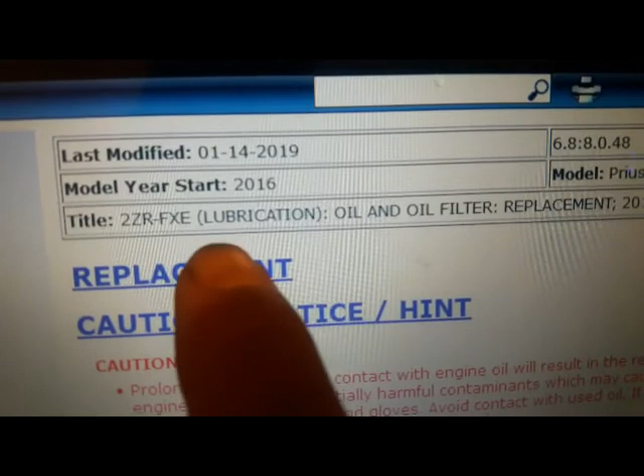So let's take a look inside here to see what technical information I need for this Prius. This software here tells you the engine type, 2ZR-FXE.

So this is for Prius from production date, I guess, November 2015 to December 2018. Same procedure, I'm going down to the oil change section. And on here, first thing it tells me is to go down there, look at the plate like that, and take off the three screws in the rear there.

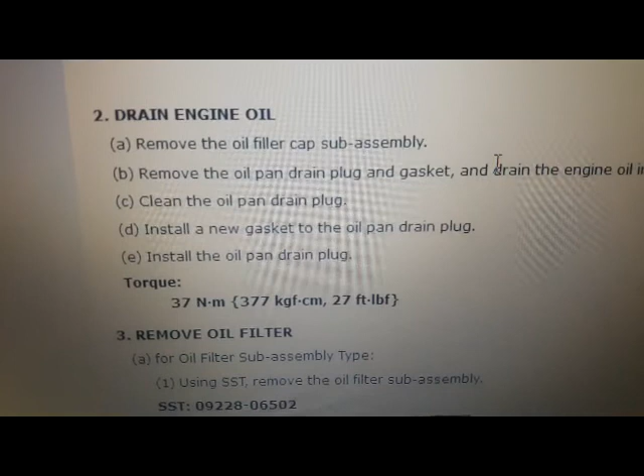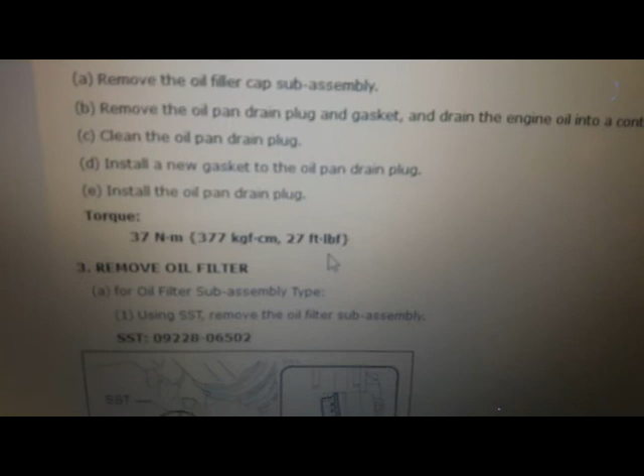After that, drain the engine oil. And the torque that I'm looking for here is 27 foot-pound, right there, for the drain plug. Okay, come on camera, focus. There you go, 27 foot-pound.

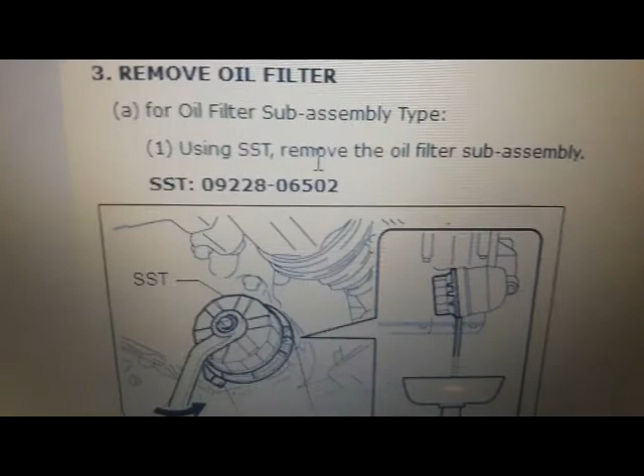Alright, under the removing oil filter section, that's when I realized that this model of Prius has two types of filter. One of them is called the oil filter sub-assembly type, okay, which is this one right here, sub-assembly oil filter, and there's a part number for it, and that looks like a regular oil filter.

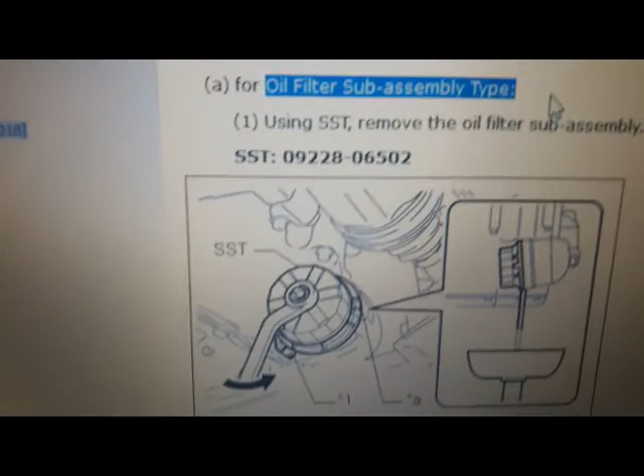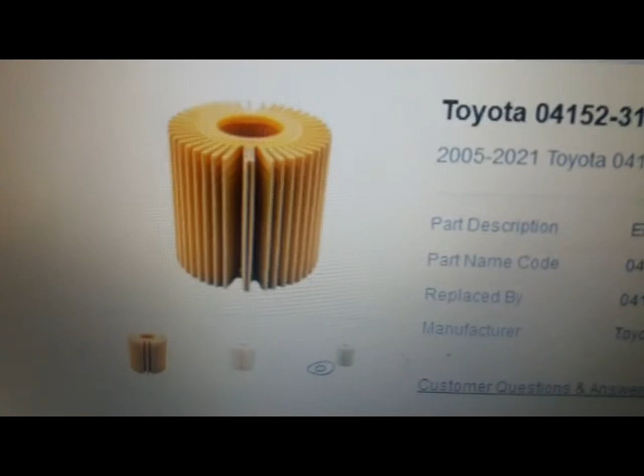And then the other type is called the oil filter element kit type. That's this one right here. This is the one I got on my Prius.

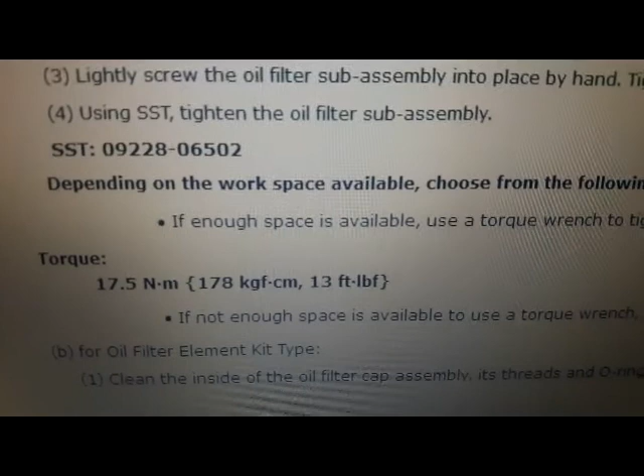So if you got one of these, then when you put in this filter, you apply clean engine oil to the gasket of the new oil filter, and the torque on that is 13 foot-pound right here. If you have enough space, then you put a torque wrench and torque it down to 13 foot-pound.

If not enough space, then you can tighten the oil filter sub-assembly three-quarter turn by hand or use a common wrench, okay, that's what it says right there. So if you have space, use a torque wrench, 13 foot-pound. If you don't have space, turn it three-quarter turn.

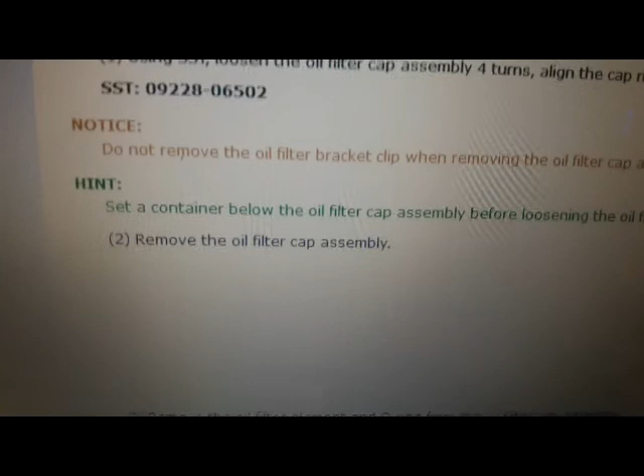For the element kit type, which is the one that looks like this, there's the part number for it. I'll put all this in the description for you. And for this type of filter, basically it tells you to use this tool right here, and you can use this tool to take out both types of filter.

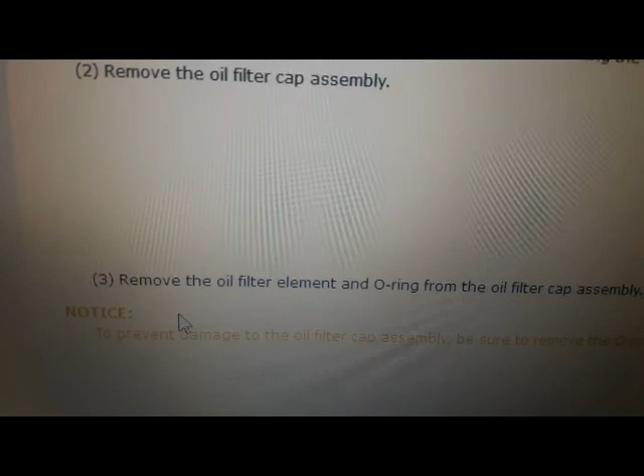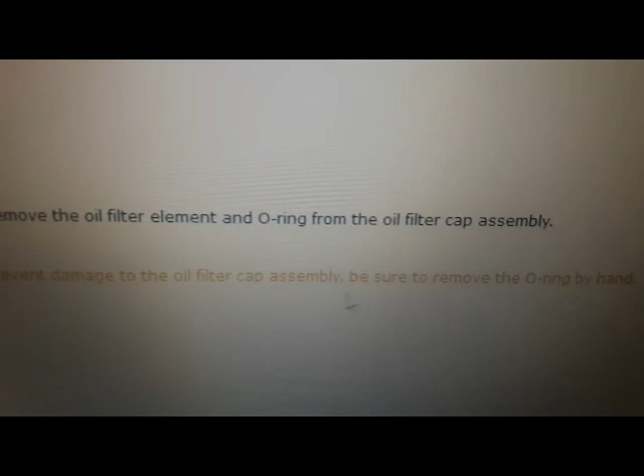Okay, so on this one it says remove the oil element O-ring from the filter cap assembly, and it says here, prevent damage to the oil filter cap assembly, be sure you remove the O-ring by hand. That's what it says right there.

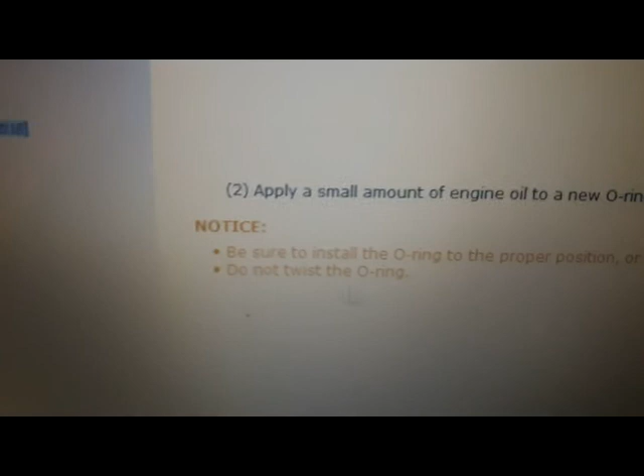And then going down here, it also tells you to apply a small amount of engine oil to the new O-ring and install it into the filter cap assembly. Really simple right there, you install the O-ring, it goes into the proper groove, not down here like this.

Then on here it tells you to apply a small amount of engine oil to the O-ring of the oil filter cap assembly again, and then put the cap in. So you put oil on the O-ring when you put on the cap, and then before you install the cap, you put engine oil onto that O-ring again.

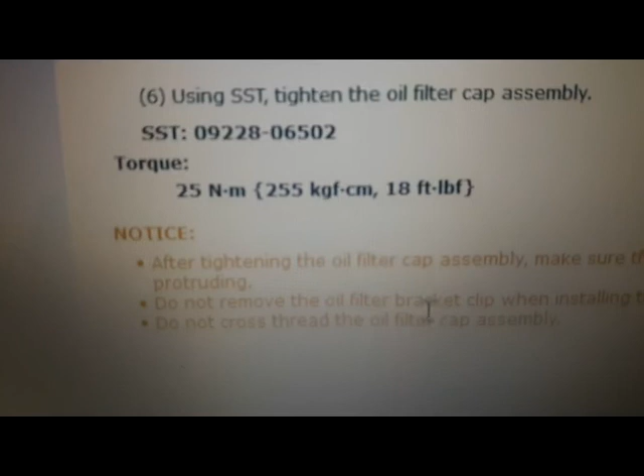And the torque on that is 18 foot-pound. After tightening the oil filter cap assembly, make sure that there are no gaps and that the O-ring is not protruding. So basically they have this picture right here.

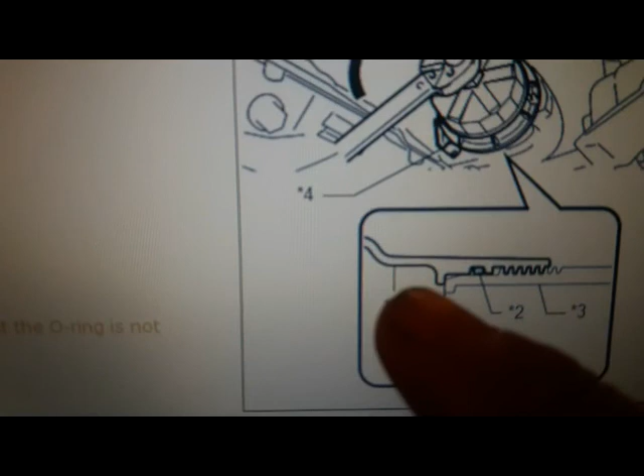So you're looking at the oil filter and the housing, there's no gap. And you don't want the O-ring, it's right there on number 2, so you don't want to see the O-ring sticking all the way out here or it's going to leak.

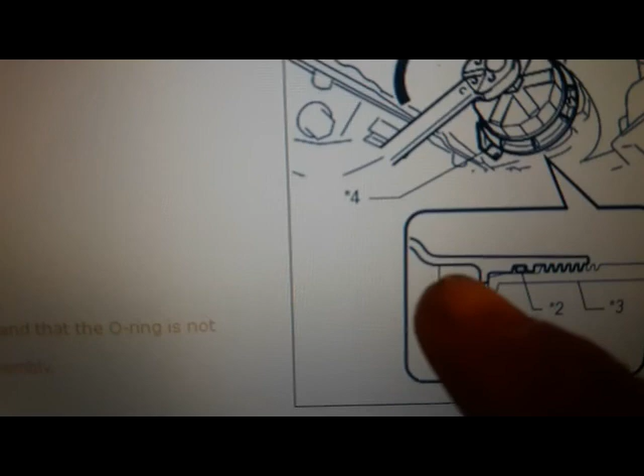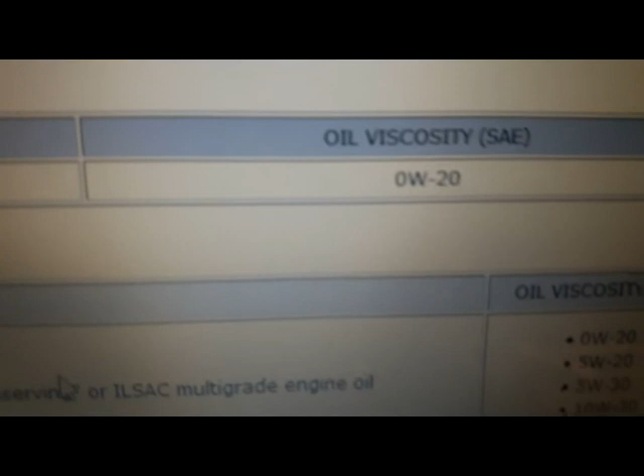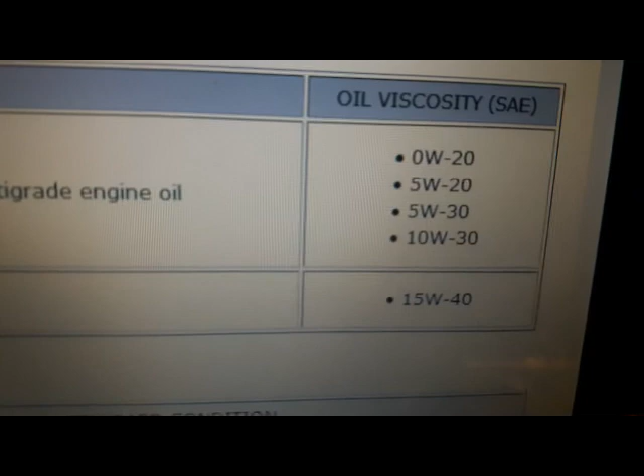For the engine oil section, for the USA I get to use 0W20, okay, the viscosity of it. And for Mexico, I guess if you buy a car in Mexico, you can use all types of oil that you want. So that's what it says right there.

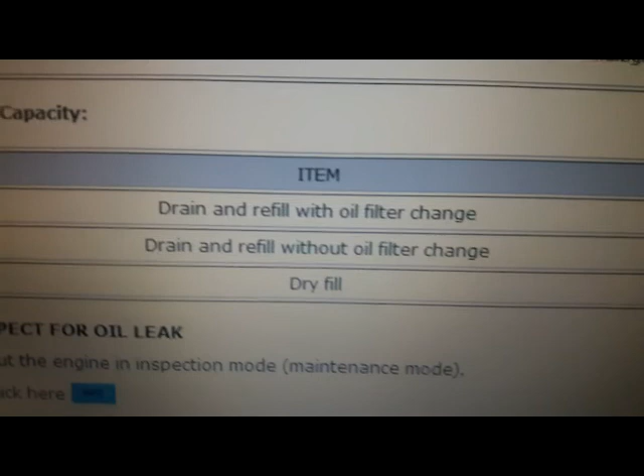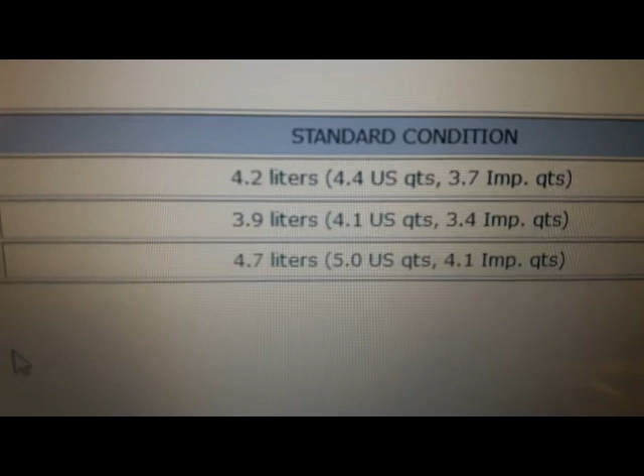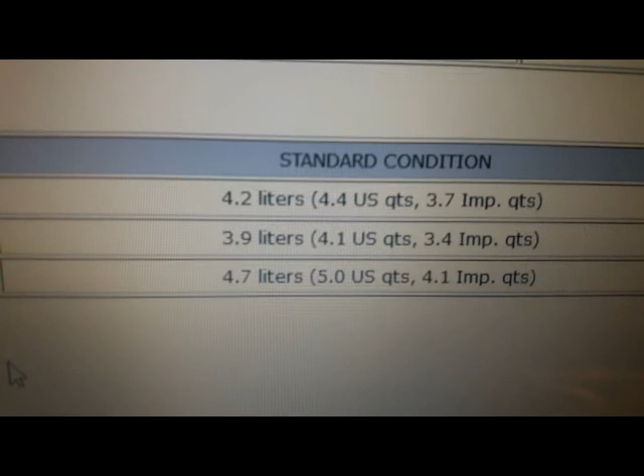And then under capacity, drain and refill with oil filter, then it's 4.4 US quarts, that's on the first line there. The second line, if you drain the oil without a filter, there's 4.1 US quarts or 3.9 liters. And then if you overhaul, then it's 4.7 liters or 5 quarts. So I'll be using 4.2 liters or 4.4 US quarts.

Under check engine oil level, it's telling me to put the engine in inspection mode or maintenance mode, okay, I think on my car it's called maintenance mode. You do that, the gas engine will kick on, and you let that engine warm up and stop the engine, then wait 5 minutes, then you check the dipstick to make sure that it's at full level.

If not, check for oil leaks. If no oil leaks, then you add oil to the full level marks. So if you check the oil level and everything is good to go, no oil leaks, then you put on that cover, tighten down the 3 screws, and you're done.

So that's all the technical information I need. Now I'm going out there to do this oil change. I used to put the car on the ramp, so make sure your car is in park, engine off, and parking brakes on. Okay, I'm under the hood.

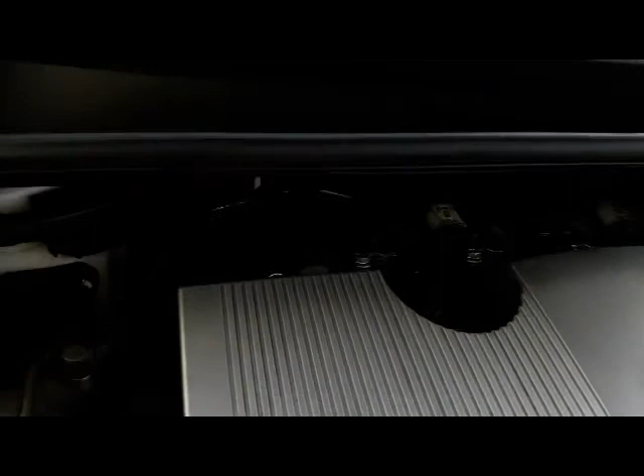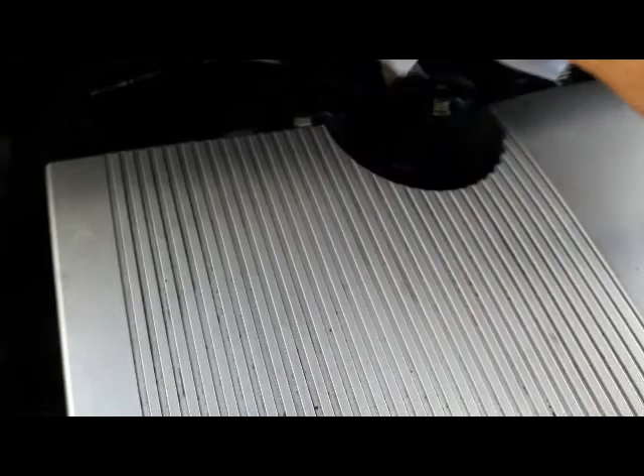So it looks like this car uses SAE 0W20, it says so on there. I'm gonna open this, it's a little too hard, so I'm gonna put the rag on here. I got a 13mm wrench, put it on, and this helps me turn this cap loose. I'm just gonna loosen this up like so.

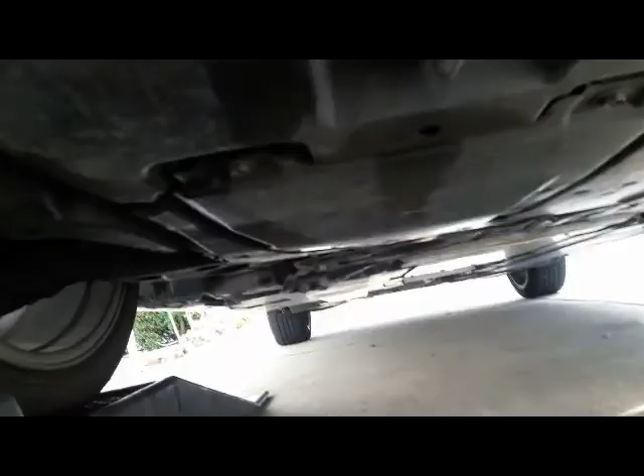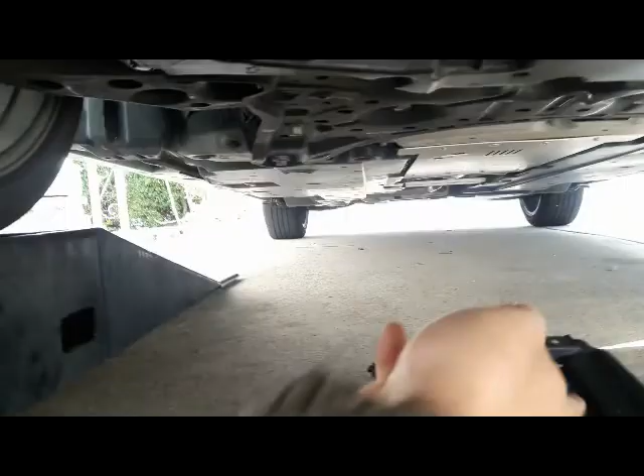Now I'm gonna crawl underneath the car. Underneath the car, this is the right front, and that's the left front. As I'm looking underneath here, I see this panel. It has an arrow right here, and it's got 3 10mm screws. So I'm gonna remove one, two, and one more back here. I'm using a 10mm deep socket with a cordless ratchet to remove the 3 screws. Here's the 3 screws, and the panel looks something like that.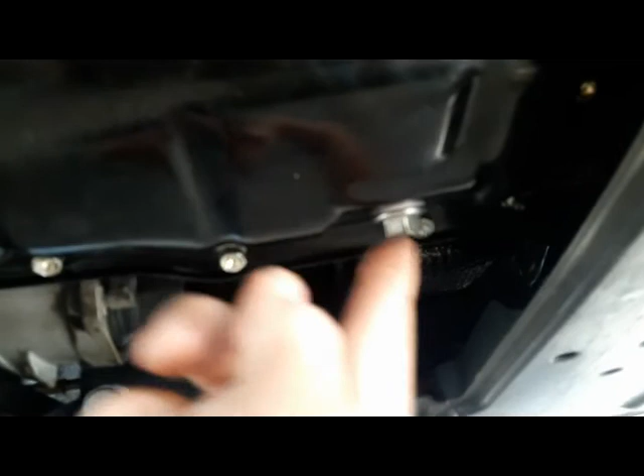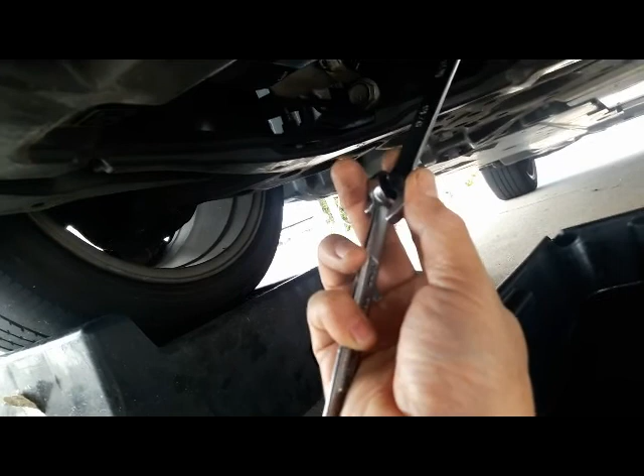Underneath that panel, I see a drain plug right here, and the oil filter right here. The bolt size is 14mm. I'm using a 9/16, which is equivalent to 14mm, and another wrench. I double wrench it, and what you want to do is turn this counterclockwise, pushing it toward the right side of the car like so to loosen it.

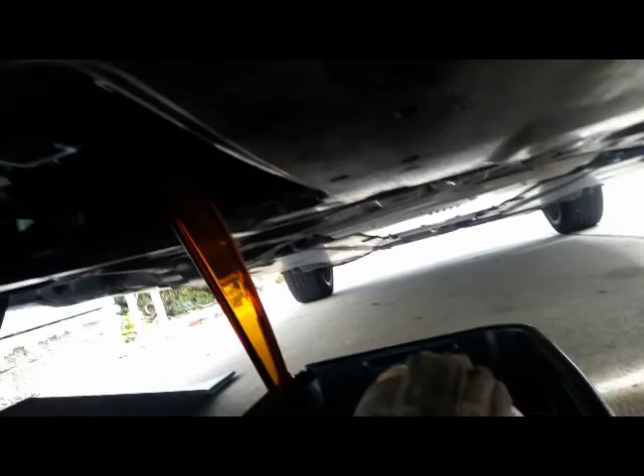Okay, I'm gonna put this thing up here. So that's what I'm doing, just letting the oil drain out. Then I mark the position of the filter, that way it's easy for me when I put it back on. I know that's where it's supposed to be. This one looks flush.

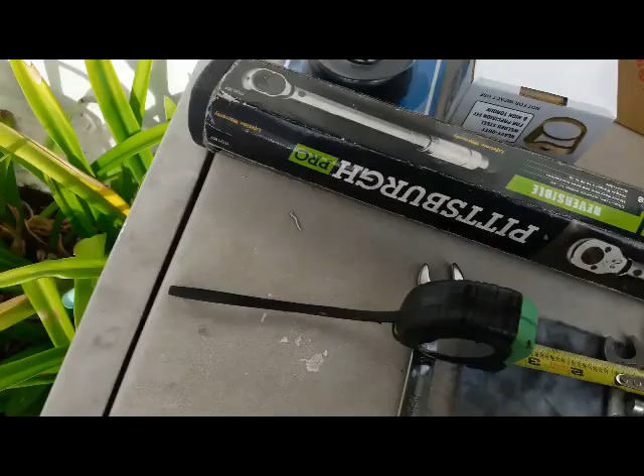While I'm waiting for the oil to drain, I clean this drain plug up, and I like to measure it. So right there, the thread area looks like it's less than half inch. So I also measure the pitch, it's 1.25 pitch, and I know this bolt is 12mm, 14mm.

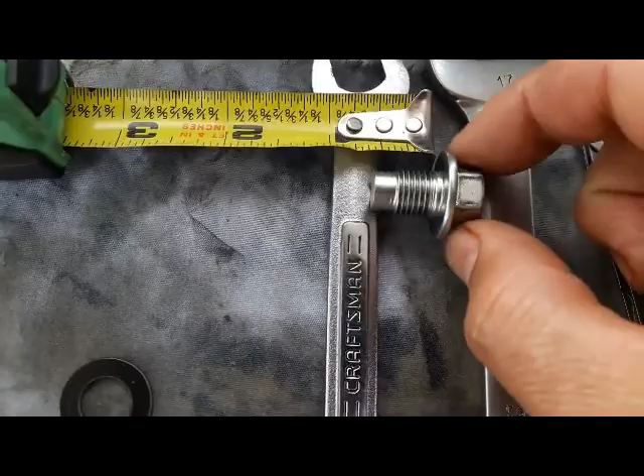14mm on the nut side here, and the reason I do that is just in case. I always have a backup, just in case one day this thing strips, whether the oil pan or this plug strips, I know the replacement.

I made a video on how to fix the oil pan when it's stripped. If you want to look at my video, it's the 2010 Honda Civic oil change part 2. I'll show you a couple options you can use to fix it if your oil pan strips. I hope that never happens to you, but just in case, you have a backup plan.

Now I know that's for Honda, but the theory is the same. The difference is the size of the bolt. Where Honda uses 14 millimeter 1.5 pitch, Toyota here uses 12 millimeter 1.25 pitch. So watch that video if you want to know how to fix it, just in case one day it happens to you.

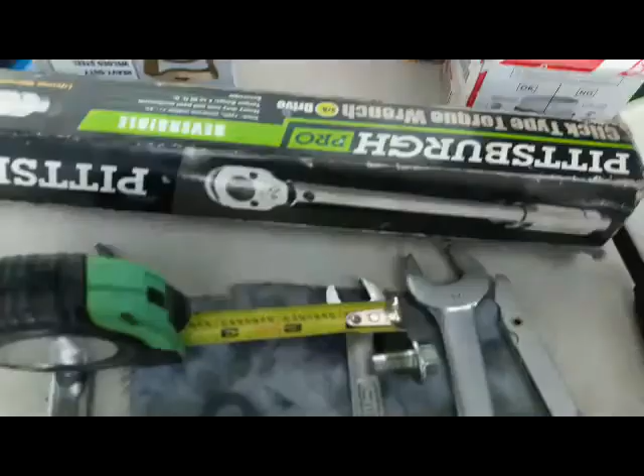After measurement, I jot it down so I remember. I'm gonna go ahead and change it with the new gasket here. This is the one the dealer used. It looks like this gasket is aluminum, and it has a rubber-like material on both sides of the gasket. This one here has the same thing.

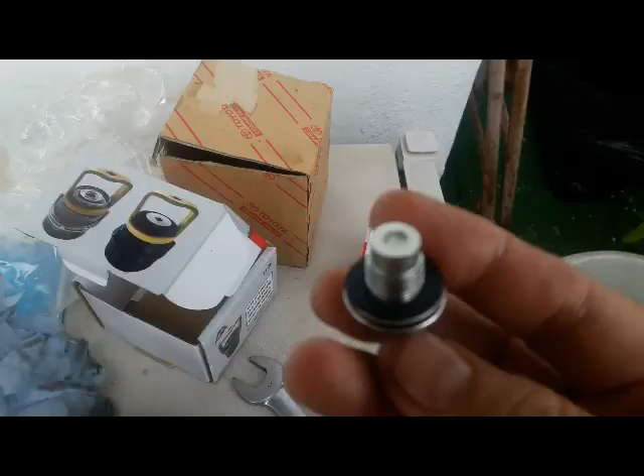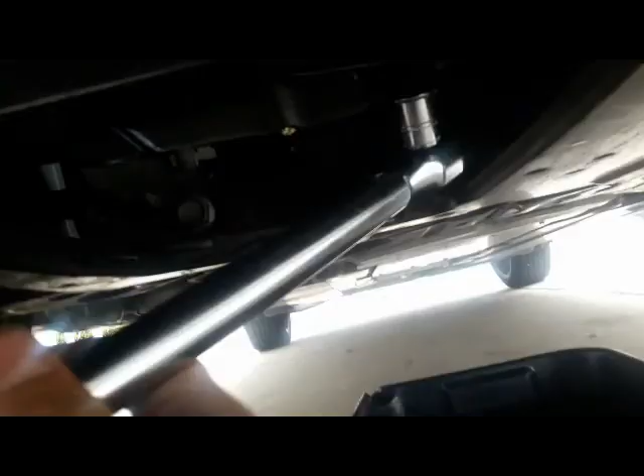Just replace it with a brand new gasket. So after I put in the new gasket, I'm ready to install it. Make sure the area where this thing screws on, where the oil pan is at, is clean before you install this plug. After the oil drains out, I put in a new drain plug with the new gasket, 14 millimeter. I use a 3/8 inch drive torque wrench, torque it down to 27 foot-pounds.

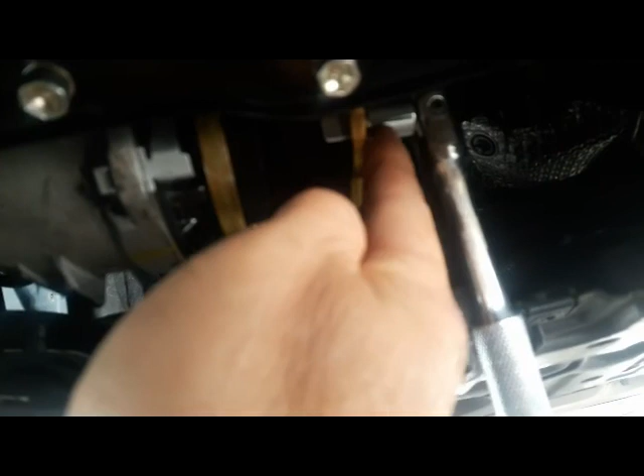Now moving on to the filter side. I bought this tool from the dealer, I'm gonna put this in. It has a 1/2 inch socket right here, so I'm putting in the 1/2 inch reduced down to 3/8 because I have a 3/8 breaker bar. So I was able to break it loose.

So you see the mark that I marked earlier. You want to turn this counterclockwise toward the back side of the car to loosen it. After I broke that loose, now I'm gonna take out my breaker bar and install the ratchet and start unscrewing this filter. There you go, put in the 3/8 ratchet and unscrew this filter.

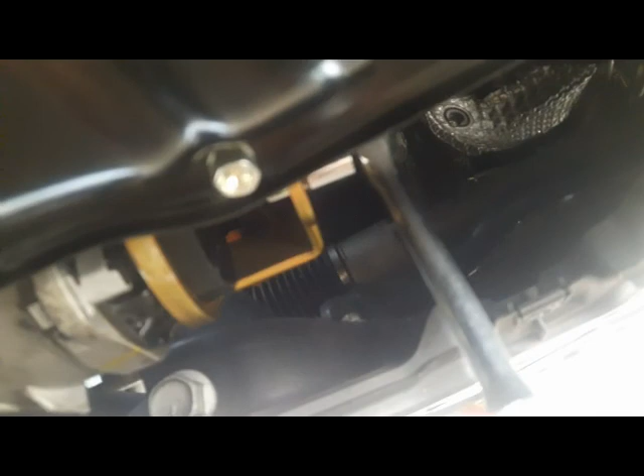Okay, I'm gonna get the catch pan ready. There's some oil gonna flow out of here. There it is, it's coming out, the oil starts dripping out. I'm gonna let it drip.

Okay, now I'm gonna remove my ratchet because I think I can turn this by hand now. And I'm gonna get this out like so. Make sure you have a good catch pan to catch all this. And there it is. Whoosh. There goes the oil filter element. I don't know if you can see it on my camera there, but there it is.

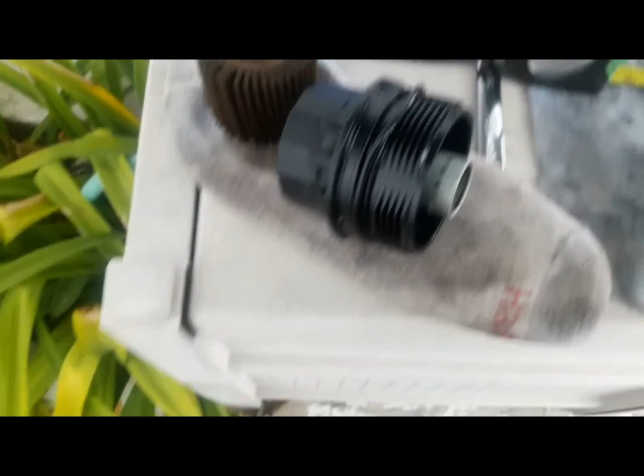Okay, so I'm going to take this out, clean up, install a new filter element, and put it back in. Okay, so here is the filter just came out. There's the filter element. Just clean it real good and remove the O-ring out of here.

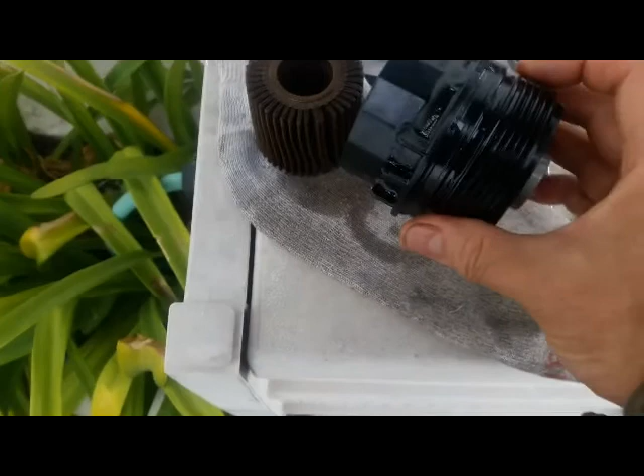Okay, now in the repair manual it says do this by hand. All right, and now I'm going to check, make sure the area is all clean where the O-ring is going to sit in.

Okay, next thing I'm going to do, this is a new O-ring. I'm going to lubricate it with the new engine oil, and then I install this thing on.

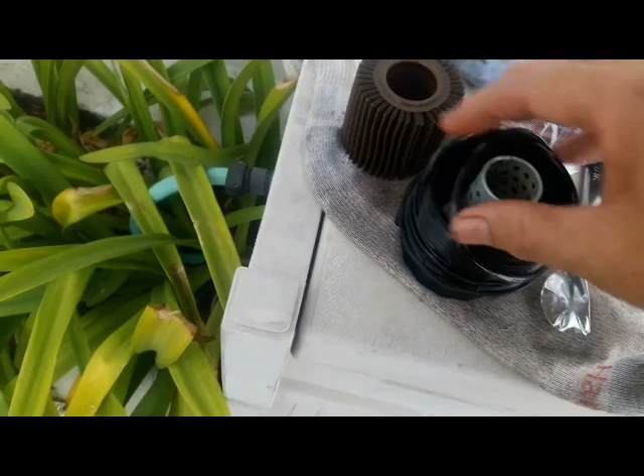Okay, so I'm going to need 2 hands for this. What you want to do is install it in, check it to make sure it's not twisted. I'm going to need 2 hands for this. And there it is, the O-ring is sitting onto that oil groove.

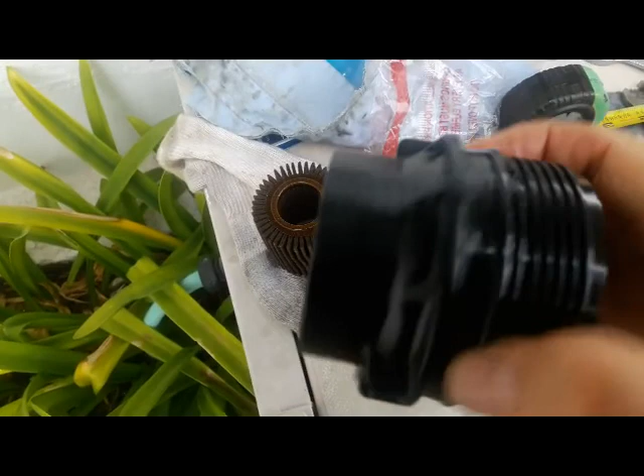Turn it around, make sure it's not twisted. Okay, turn it around and inspect to make sure it's not twisted. Now in the repair manual, they're going to tell you to lubricate the O-ring again when you install it in.

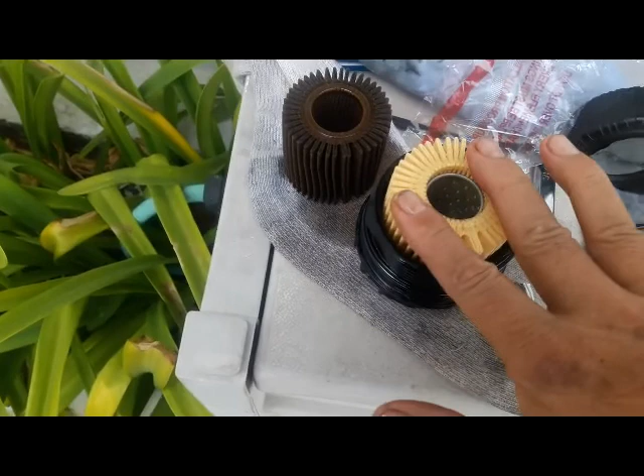Okay, but now what I'm going to do, here's a new filter, and it don't matter which end, all look the same. Just put it in like so, like that, okay? Spring pressure, see that? All right, so I'm gonna take clean oil.

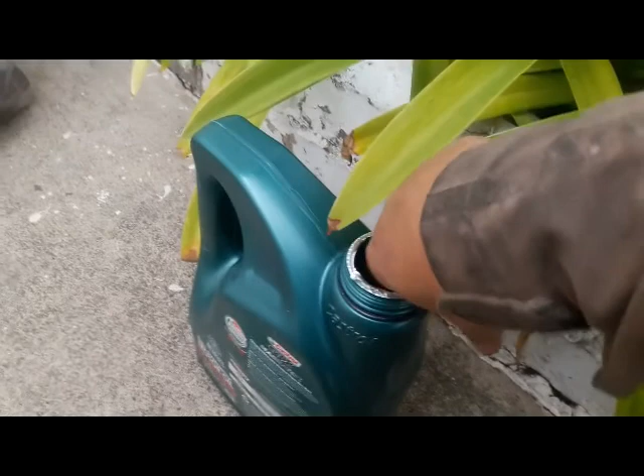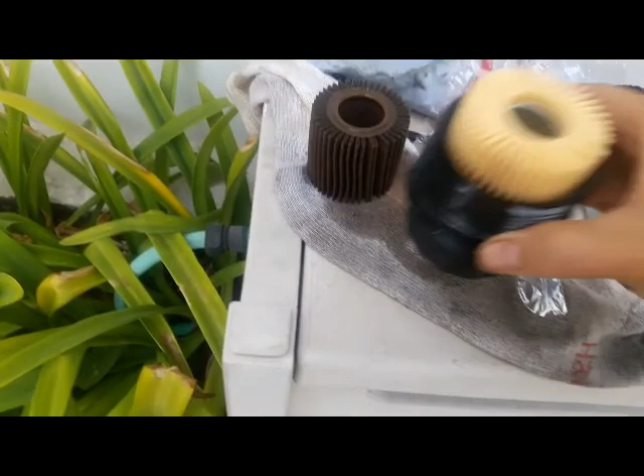I'm gonna lubricate this O-ring again before I slide this thing in, okay? Do it like that. Make sure this O-ring is well lubricated. That way, when you screw it in, it sits in easy.

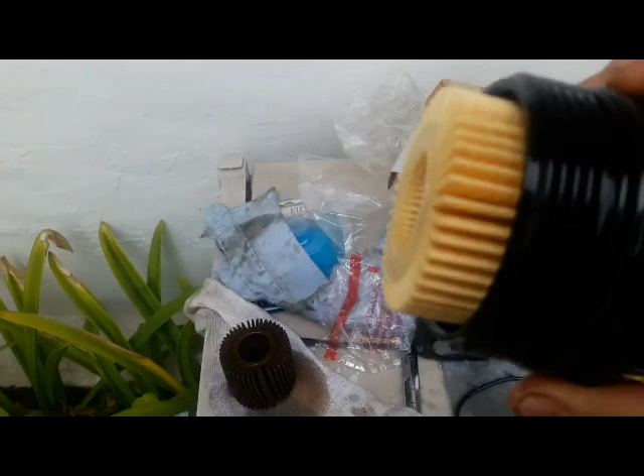Okay, all right, so now I got this ready. I'm gonna make sure the area where this screws in is clean. And after that, I'm gonna take this and screw it in. All right, so make sure that area is clean.

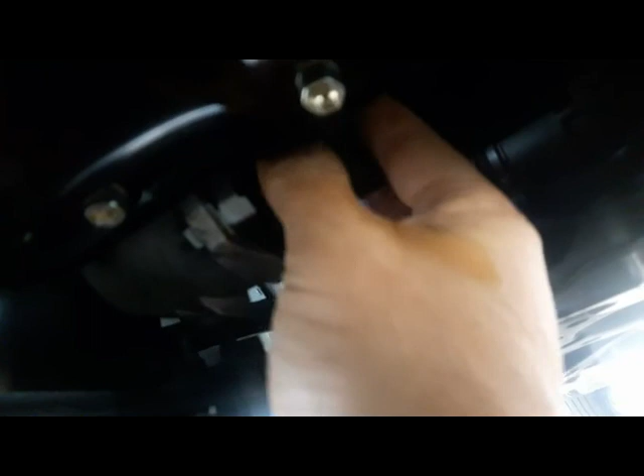I'm gonna put this in like so. I'm going to do a couple counterclockwise turns to make sure the thread is aligned. Okay, and then I'm going to tighten it in. There you go, look like it's in, look like it's screwed in.

Okay, screw in by hand all the way into a seat. So after I installed it by hand into it, not turning anymore, I put my ratchet on and continue tightening it, because remember that filter has a spring pressure. Okay, so anyway, when it stopped, I'm using a torque wrench set to 18 foot-pounds, and as I'm torquing it, I noticed that mark I made earlier is lined up perfectly.

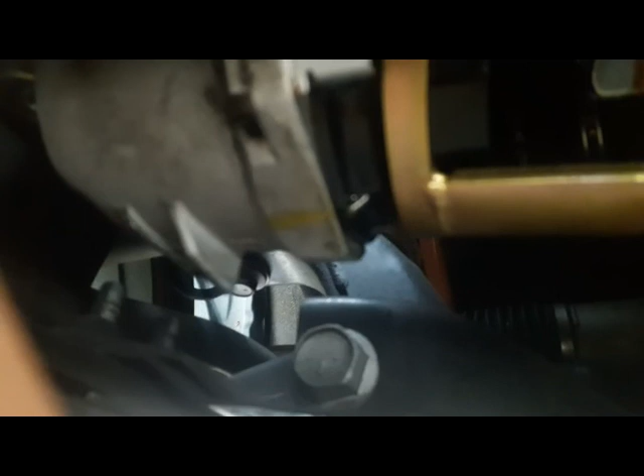Okay, so what's that mean for you? If you don't have a torque wrench, before you do this, make sure you mark it. That way when you tighten it down, it's back where it was. And to me, it worked out really well.

And of course, you want to check to make sure there's no gap here. It's flush with the plastic part, flush with the housing. You don't want to see any rubber or that O-ring protruding out. If you see it, stop right here and replace the O-ring.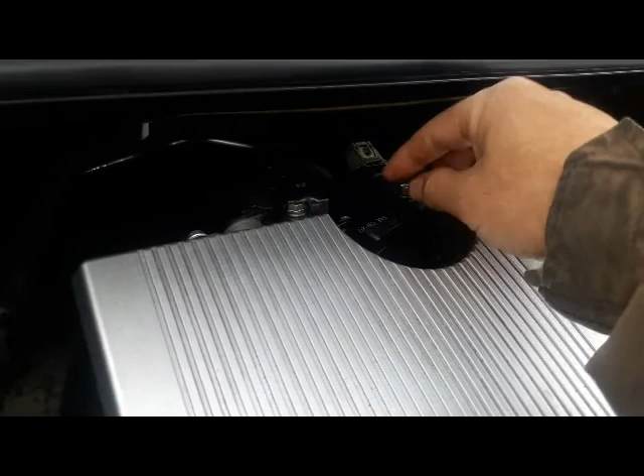Okay, next thing I'm going to do now is remove this torque wrench and remove the wrench out, and get ready to put in the oil. Okay, so I got this already loosened earlier. I'm going to take this out. Now what I want to do is make sure these areas are clean, put the funnel on, and pour in the oil.

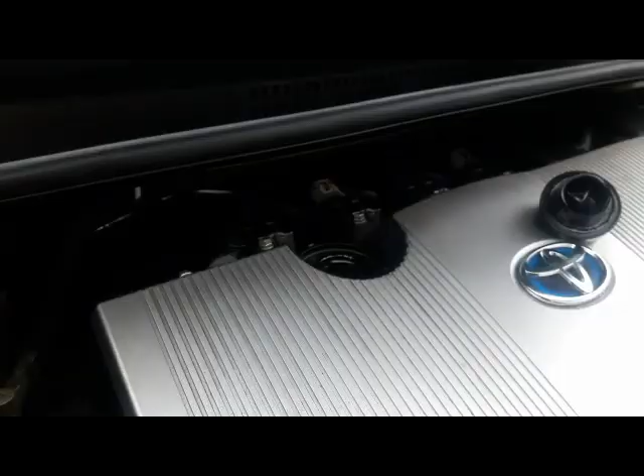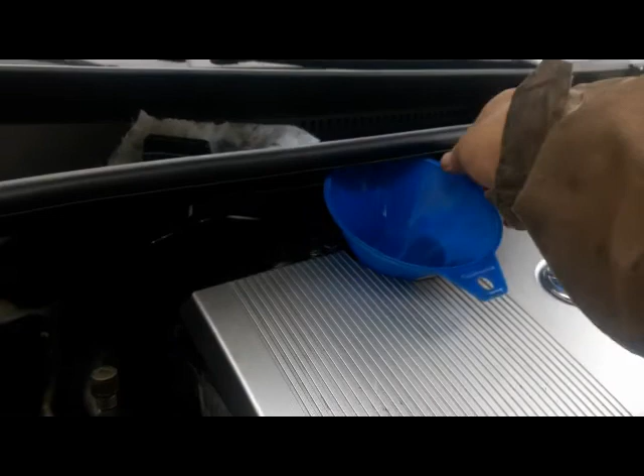Okay, so I'm going to start out with 4 quarts using a funnel. Otherwise you might spill the oil over your engine. I'm using 4 quarts to start with. Take the funnel out, and now what you want to do is put the oil cap back.

So make sure it's clean, this area's clean, put them back. Okay, just hand tighten them. You don't have to use a wrench or anything like that.

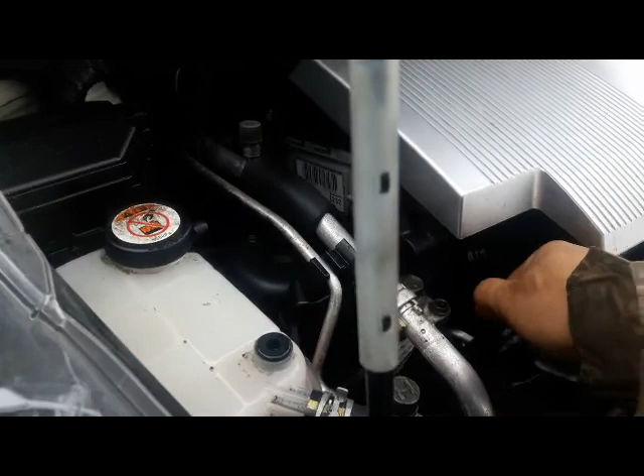Okay, now the most important thing you want to do is check the dipstick to make sure you got oil in there. Okay, so it looked like I got oil in there, so that's good.

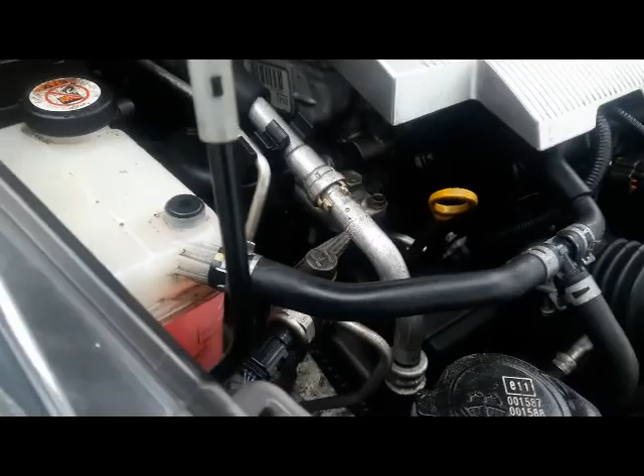And you go down here. You want to check to make sure that everything's still nice and dry. If you see a leak, stop right here and fix the leaks. See right there, it's still nice and dry.

So what I'm going to do is go inside the car and put it in inspection or maintenance mode. To put this Prius in maintenance mode, make sure your parking brake is on, and it's easier if you use your left foot to brake during this procedure and your right foot for the gas pedal.

I'm going to press the power button twice with the brake off. Foot off the brake. Power button twice, 1, 2. Now I'm going to step on the gas pedal with my right foot twice, 1, 2. You floor it.

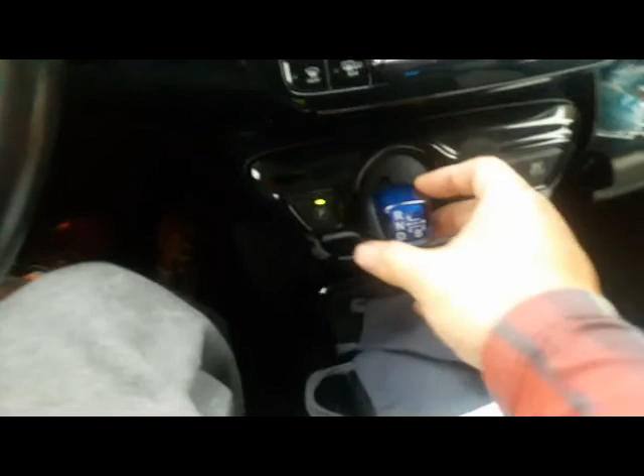Now you put your left foot on the brake and hold it there. Now you want to shift it into neutral, make sure it's in neutral, and step on the gas twice, 1, 2. Then you take it out of gear and put it in park. Step on the gas pedal, 1, 2, and then it should display maintenance mode.

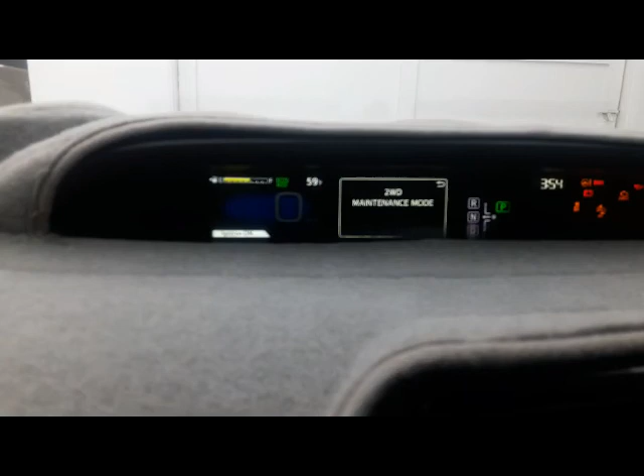When you see that, you press the power button one time, and the engine should start right there. You hear that? Now you can take your left foot off the brake pedal because you've got the parking brake on and it's in park. Right there you see the gasoline engine kick on, and that's how you put this car in maintenance mode. To take it off maintenance mode, all you have to do is press this power button, boom, and that takes it out of maintenance mode, and it will shut down.

When I get to this part, my camera stopped working because it was running too hot. So even my camera needed a break. But anyway, I'm going to talk you right through it.

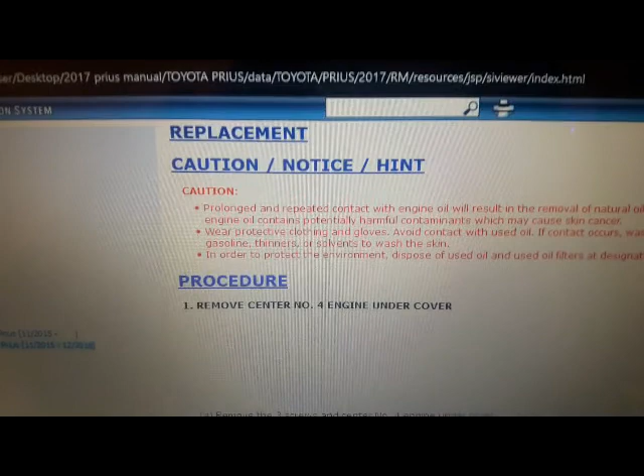So my car is running under inspection or maintenance mode where the gasoline engine kicks in. I leave the key in the car with my two windows rolled down, went outside, and inspected for oil leaks. The area around the drain plug and the filter looked really good, nice and dry. So what I did is I put the cover back up, the cover with three screws, the one that looks like that. I put that cover back on and went inside the car.

I pushed the power button to get the car out of inspection or maintenance mode, then I started the car back up and backed it out of the ramp, parked at a level surface. So while I'm waiting for that five minute time frame to do the final oil checks, I'm going to show you how to turn off the oil maintenance light.

Mine didn't turn on because I did this a little earlier than scheduled, so I didn't have the oil maintenance warning light, but I'm going to show you how to turn it off anyway. I'm here inside the car, and basically you'll be using the joystick on the right side of the steering wheel. When I say enter, that's the circle right there. Up or down is one of these. Left or right is one of these arrows.

I need some displays up here, so I'm going to step on the brake and push this button like so. Now I've got some displays. So what you want to do is press the arrow key, and you see when you press the arrow key, either left or right. I'm using the right one. You can see how that menu runs.

So you want to go to that wheel right there, and then press enter, which is this circle thing right here. You press that, and that thing comes up. You press enter again, and it tells you TPMS or oil maintenance. I press down for oil maintenance. Let's see, I press down, you see that thing go up and down, so you select oil maintenance right there.

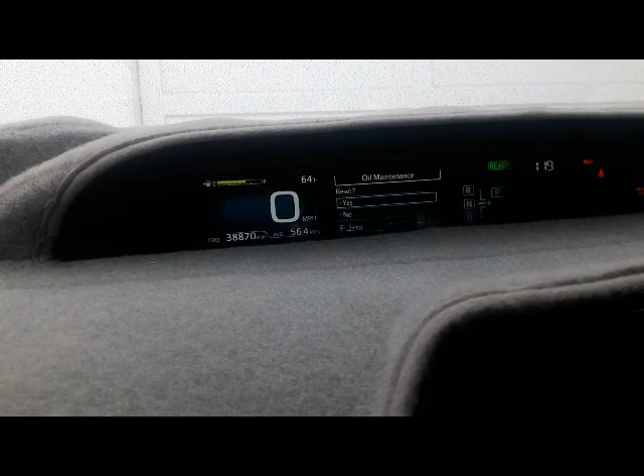I press enter again, and it tells me reset, yes or no. I'm going to bring the arrow up, I'm going to say yes, and now I press enter, and it says reset complete. To get out of the screen, you press this twice, 1, 2, you get back to that, and then you press the right or left arrow button and it takes you back to the menu.

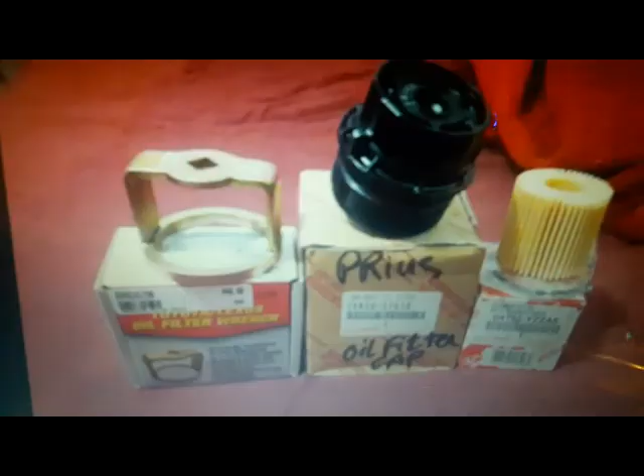And this is how I changed the oil on my 2017 Toyota Prius 3 Touring for the first time.

So after I drive around, sit on a level surface, and recheck again, I have to add half of a quart in, so the total oil change for me is 4.5 quarts.